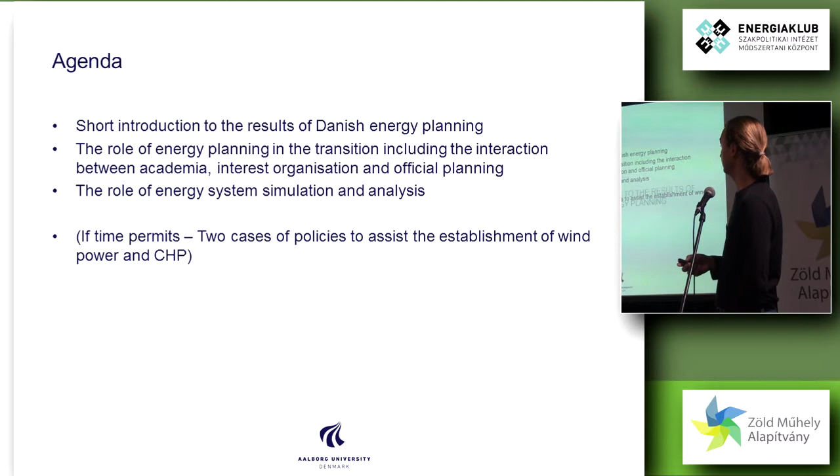So, to show you some of the key indicators of the Danish energy system development. First of all, we've had a relatively stable energy consumption over the last 40 years. It's been around 800 petajoules all since the 1970s, and that has been one of the effects of a very aggressive, very active energy policy that we've had in Denmark. So, stable electricity consumption also. 50% of the electricity consumption in Denmark comes from cogeneration of heat and power. I will come back to that in a minute.

We have a lot of district heating. More than 55% of the heating demand in Denmark is actually covered by district heating, and this number actually grows by about 1% per year. So this is an effect of people moving into the cities, but also an effect of district heating actually moving to areas currently served by, for instance, natural gas or even oil boilers.

Last year, we had 40% of wind power in the Danish energy system, which I do believe is the highest in the world. I can't imagine anywhere else with anything resembling such a number. We also have a lot of offshore wind farms. And when we're talking about offshore wind farms, we are talking about multi-100 megawatt wind farms. We're talking 200, 400, 600 megawatt wind farms. So we're developing that quite aggressively in Denmark, and that, of course, is also one of the reasons why we can reach such a high degree as 40% of wind power.

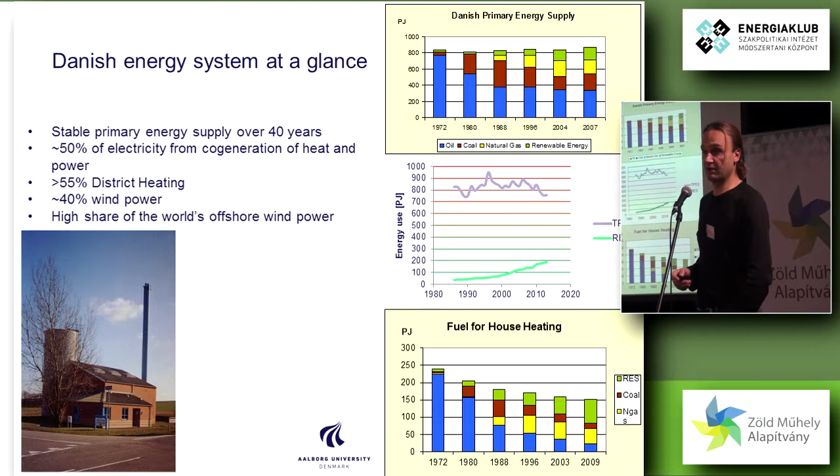This is a small decentralized CHP plant. We have them in all towns and cities in Denmark. This is even a village with only 200 houses. So it has been a very active policy of finding all the heat demands in Denmark and then establishing district heating networks and establishing CHP plants. If time permits, then I do even have a few slides on what policies we actually put in place to advance the development of district heating and CHP in Denmark.

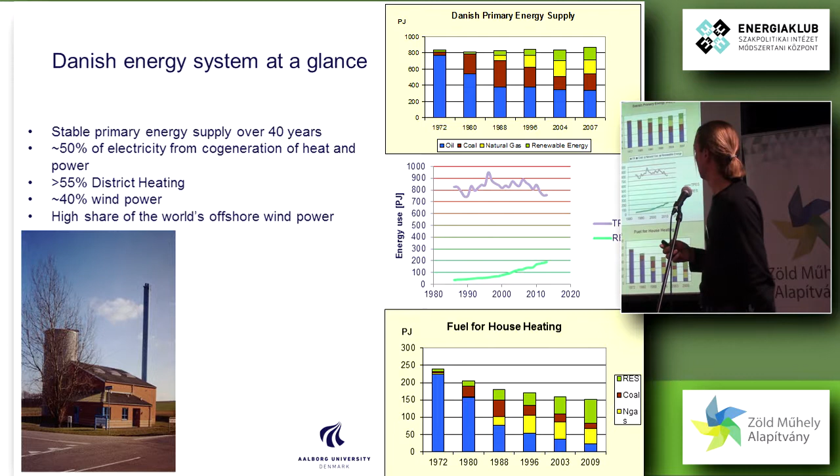If we look at the electricity system, again, 4 decades ago, it was mainly big coal-fired or oil-fired power plants at that point in time. But moving into the 90s, we saw this very large increase in CHP, all these small CHPs, and they reached up to about 25% of the power generation. And these are just the small-scale CHPs, not counting the large scales.

Wind power, this graph stops in 2013. Had it taken a few more years, then we would have reached the 40% we have this year. But we see that the developments, they started relatively early.

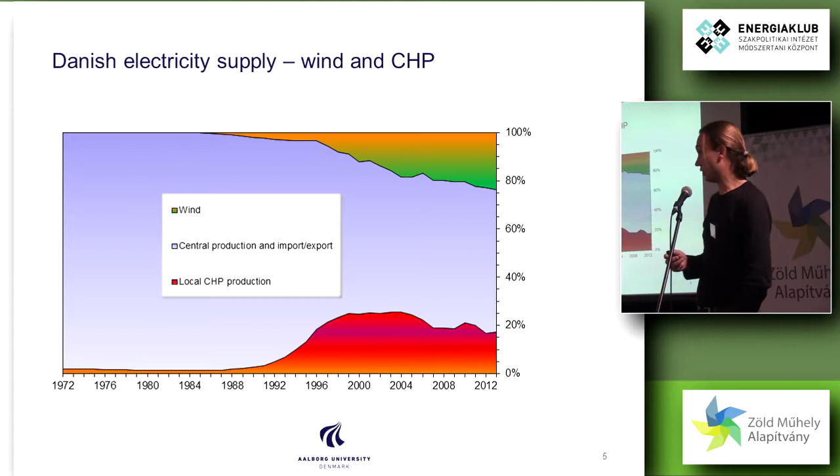The CHP plants, well, they do have some economic incentives to operate wisely, but there's no guarantee that they do it. So 75% are operating wisely, according to the prices, but some are not. I mean, basically, if you own a CHP plant, you can just set it to a timer and say, okay, turn on, or you can set it to follow the heat demand and not really what is actually demanded from the electricity system.

So this is the worst nightmare from a transmission system operator's point of view, but I think it's also been a steep learning curve for the Danish transmission system operator, because they've actually learned that it is, in fact, possible to operate a system like this. I should mention that we do have connections to other countries, so they can also help us maintain the balance in the electricity system.

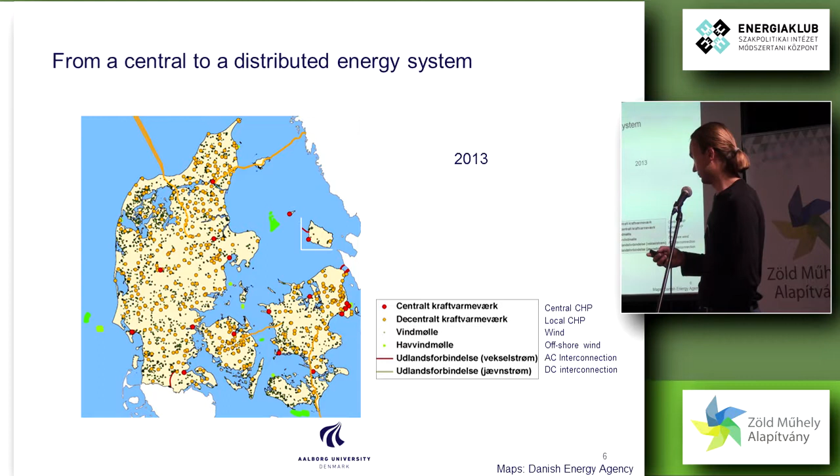And since our prime minister at that point supported Israel in one of the numerous wars in the Middle East, there was actually an embargo on Denmark, and the Middle East did not want to export oil to Denmark. So we woke up to this reality that even if we could buy oil, it was very expensive. So starting at this point in time, we had a very aggressive energy policy.

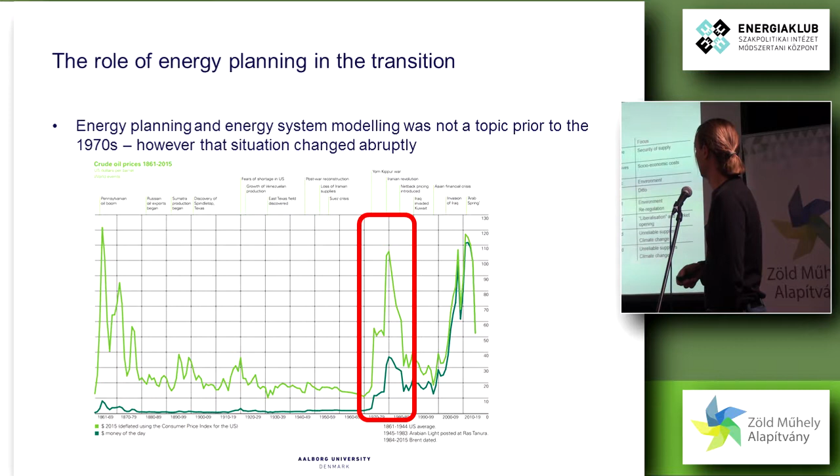So what did we decide to do? Well, we decided to build a nuclear power plant, of course, because that is what you do in a country at this point in time when you want to become independent of oil from the Middle East.

However, this was in the 70s, where whatever was going on in society was more about growing organic marijuana and listening to psychedelic music and free sex and whatever. I didn't spend much of my life in those years, but that's what I've heard. And it didn't go very well with the idea of nuclear power plants, because they're associated with reactor accidents and nuclear bombs and everything. So there was very large resistance to that.

So one thing I would like to point out is this column here, this approach. The politicians were presented with one suggestion. The Danish Ministry of Trade, we didn't have a Ministry of Energy at that time, made this plan and they said, that is the plan. Take it or take it, basically. Leave it was not an option, so it was take it or take it. I'll actually come back to this take it or take it option in a few slides.

Things progressed. I'm not going into detail with all the different energy plans that we've had, but after this initial take it or take it option, we did actually have more alternatives being presented for the politicians, and gradually we also had more and more renewable energy in the different plans, and nowadays we actually have 100% renewable energy in our energy plans, and we've had that for the last few energy plans.

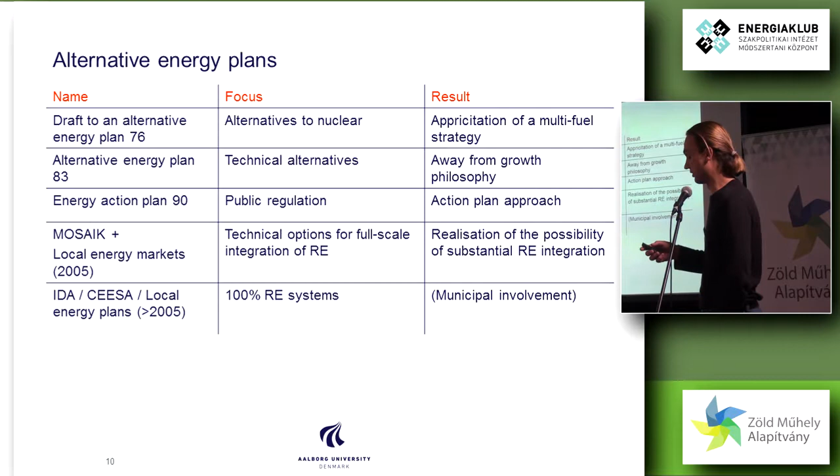So this is the work of two of my colleagues. One doing choice awareness, which he wrote a doctoral thesis on, and he stressed that it is important to have choices in the political decision process, that you're not just being presented with one alternative, that you actually have a democratic choice between different alternatives. We have true choices and false choices. Well, a false choice is a choice that is not really a choice.

For instance, if your country is going down the drain and you can't get energy and you are presenting two choices, either we go down the drain or we build nuclear power, then you actually have a false choice, because going down the drain is not really a choice. So you're just being presented with a false choice situation. It's not really a choice situation.

Hobson's choice is a term in choice theory. He was renting out horses, and people always wanted the best horse. But then at some point he said, you take the horse which is next in line. It's this horse or no horse. So that was a Hobson's choice. So take it or leave it. Or in this case, take it or take it.

Radical technology change. We have to understand that technology is not only about technical infrastructures. It is also about who owns it. It's about the knowledge. It's about the economy, the profit of the system. So everything is intertwined. And of course, when we're going from a fossil fueled power plant to a renewable energy system, we have to realize we're not just changing the technology, we are also changing who makes profit, who owns everything, what are the institutions supporting it.

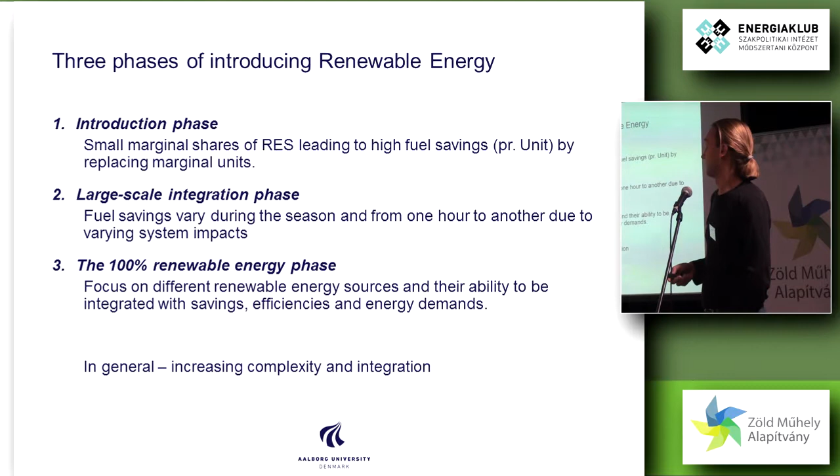We've had analysis of Denmark showing that in this introduction phase, we can take up to about 20% of wind power without doing a lot in the energy system. But when you go to the large-scale integration, then we need to look into other measures. At that point, the power plants can simply not regulate enough. So there we need to go more into the heating sector and the transportation sector to ensure that power is integrated well into the energy system.

We developed this EnergyPLAN model, which Ursula mentioned, at Aalborg University, starting around 2000. And the reason for doing this was that my colleague Henrik Lund, at that point in time, read the Danish government's energy plan, and he noticed that they had some scenarios showing that as wind power grows, the surplus electricity production grows.

And basically, according to the official plans of the Danish government, more or less, whenever you add 1 kilowatt hour of electric production on a wind turbine, then you will simply add something like 0.8 kilowatt hours of excess electricity production, which you need to get rid of. And he thought to himself, well, is that really true? And then he decided to make his own model and look into what the government was modeling and see whether he would actually agree on that.

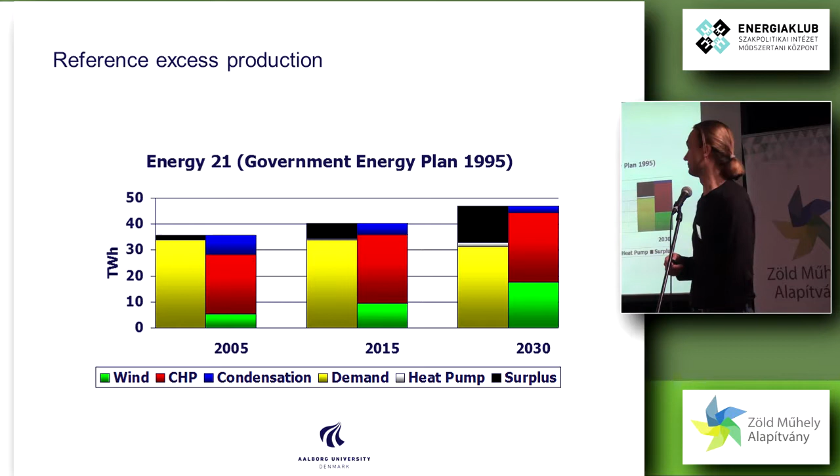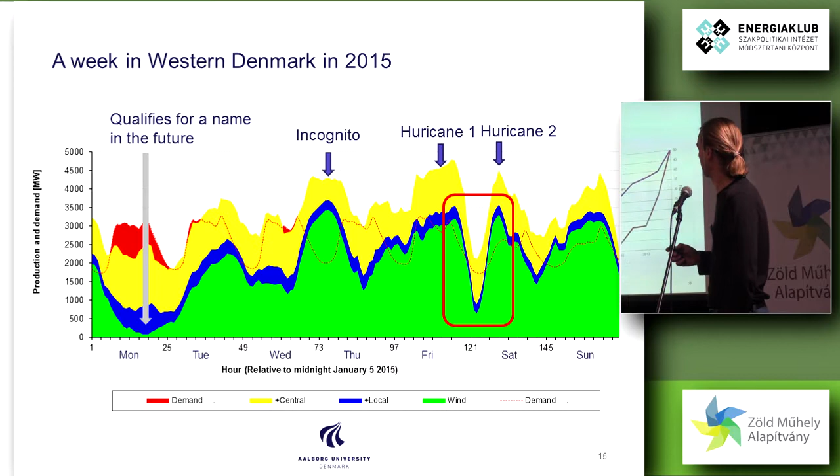So, we are looking into alternatives to this, and when you're reading the literature, you see a lot of mentioning of smart grids, electricity storage, etc. But our point of view is that that is a much too narrow approach, because smart grids cannot handle this. The flexible electricity demand, or the potential for flexible electricity demand, can never accommodate such large fluctuations.

So, electricity storage, of course, anything can be accomplished with electricity storage if you simply want to put enough money into your system. But if, rather than using electricity storage, which is rather expensive, you can use thermal storage or even gas storage for some synthetic fuels for the transportation sector, or liquid fuels, again for the transportation sector, then we will have storage capacity which is a lot cheaper.

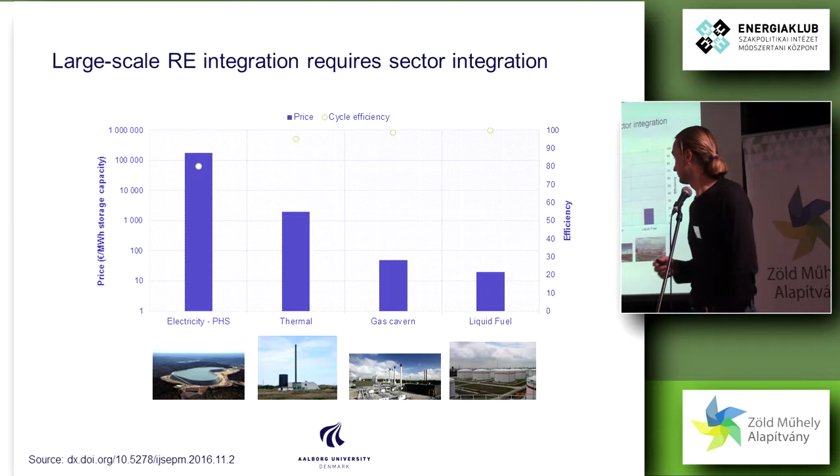Notice that the vertical axis here is not linear, it's logarithmic. So the other storages, they are 10-fold or 100-fold cheaper than electricity storage. Of course, producing hot water will not enable you to feed electricity back into the grid. So it's kind of a one-way storage, but it will enable you to defer some loads, and the same for the transportation sector. I mean, you can produce it whenever it's applicable or relevant for the energy system, but of course you cannot feed back.

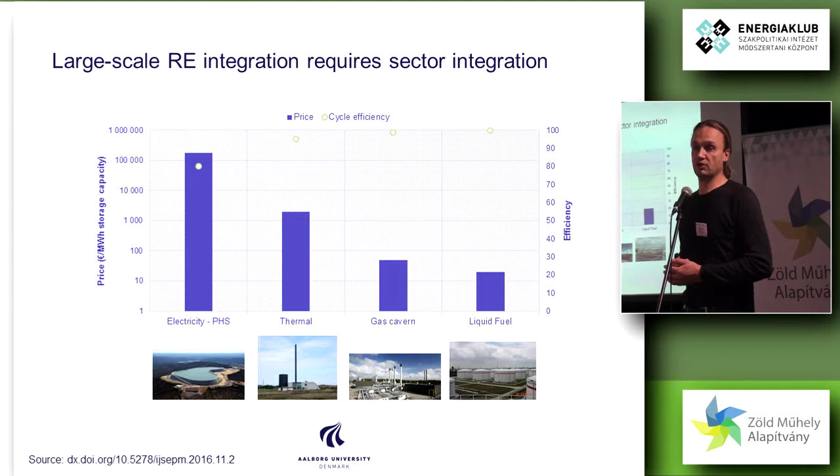There are losses associated with this, but another key point in our analysis is that whatever we're going to do, the transportation sector and the heating sector is going to be based on electricity to a very large extent in the future. So even though we might have some transformation losses going to these synthetic fuels or going to heat, those are losses that we are going to encounter, whatever. So we will not avoid them. They will be there.

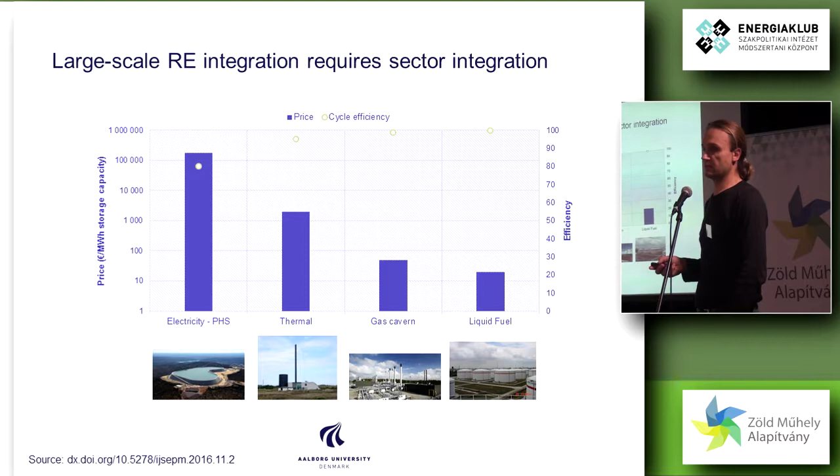So now it's just a matter of having the correct timing and have the correct storage facilities. I'm not saying that electricity storage cannot play a role, but to the extent possible, we should try not to have electricity storage, at least when you're not in a country with hydropower. We don't have hydropower in Denmark. The highest mountain in Denmark is 170 meters.

The role of energy system simulation and analysis. So we're going towards a much more complex energy system, and that really calls for tools which can handle this complexity, all the interconnections between the different sectors, the interconnection between the production of liquid fuels for the transportation sector, which might be based on CO2 from a biomass-fired CHP plant, and the unit will also supply district heating into the grid and so on. So we need models, simulation tools which can capture this complexity of the future.

So all sectors need to be integrated, and everything, wherever we have some benefit to be harvested, some synergies to be harvested from integrating sectors, we need to do that. And then my little advertisement there, one model which can handle this is the EnergyPLAN model.

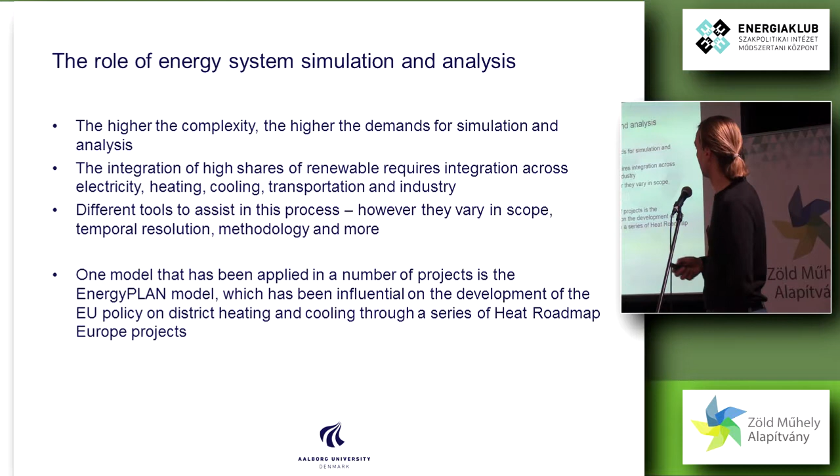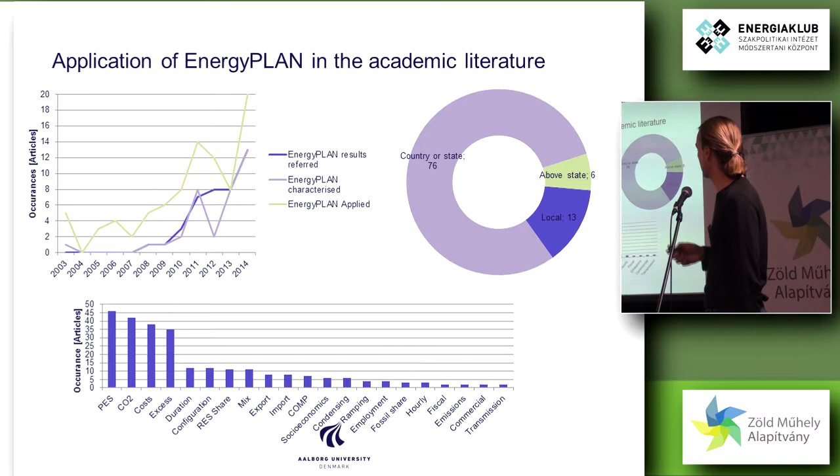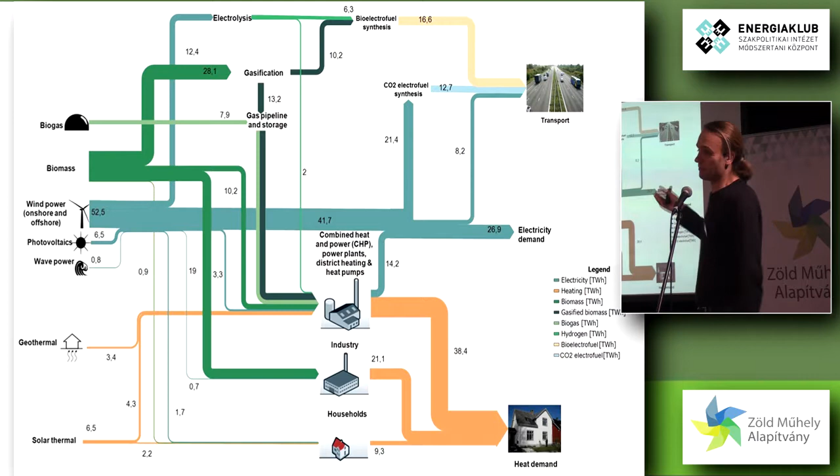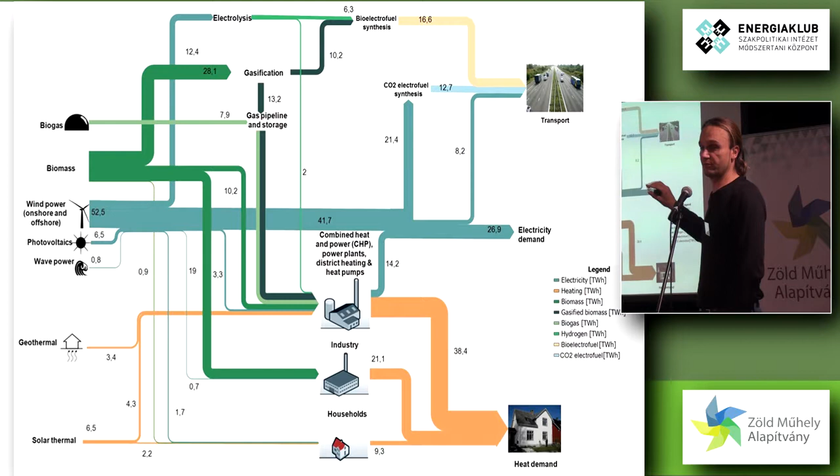I will skip this because you introduced it verbally. And I'll also skip this because you introduced it. But just to show what are the kind of systems that we're coming towards. It is systems like this where you have all these multiple interconnections, and we've not even drawn all interconnections on this chart here, but it is about a lot of renewable energy.

I have colleagues at another university in Denmark saying that for a Danish system we should have something like 80% of wind power and 20% of PV. That is the optimal combination under Danish circumstances. That of course varies from country to country and availability of fuels, but this is not so much based on the spatial availability, but more based on the temporal distribution of the production.

We are going to have heat pumps, we're going to have production of synthetic fuels, we are going to have CO2 taken out of the combustion gases for the production of synthetic fuels. We're going to have cooling processes and district heating processes combined. As I mentioned, 55% of the heating demand in Denmark is nowadays covered by district heating. We don't have much of a cooling demand in Denmark, but it is growing. Also because the buildings are actually getting better and better.

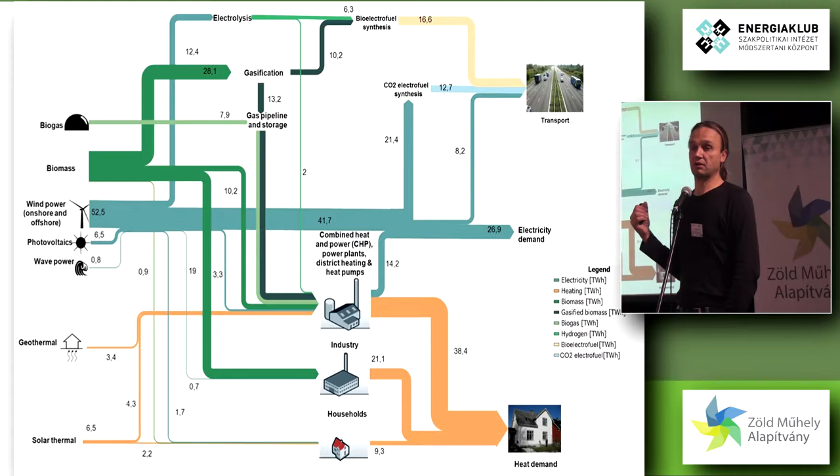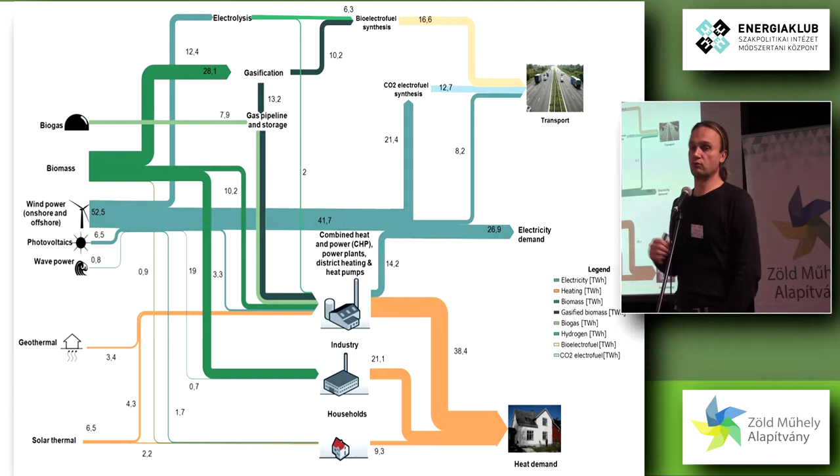And you can make a building so good that, okay, you save a lot of energy in the wintertime, but it becomes unbearable the rest of the year. And that is what we're trying to do right now, meaning making them unbearable in the summer. We call it passive houses. So I foresee that we're going to have more and more cooling.

And of course, cooling and heating, they can be very well integrated, and many Danish district heating companies are currently looking into how they can provide cooling also. Because you can do that with an absorption pump in the different houses or in the department stores or office buildings, but you can also have separate district heating or district cooling networks. So complex energy systems are what we are aiming at.